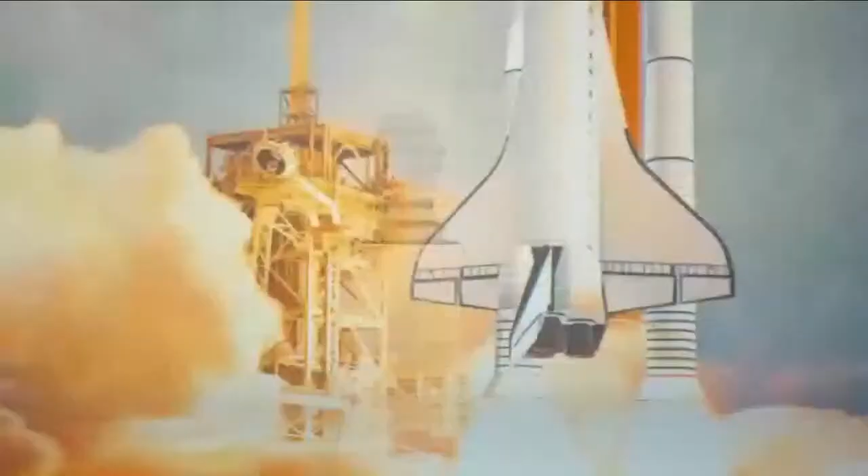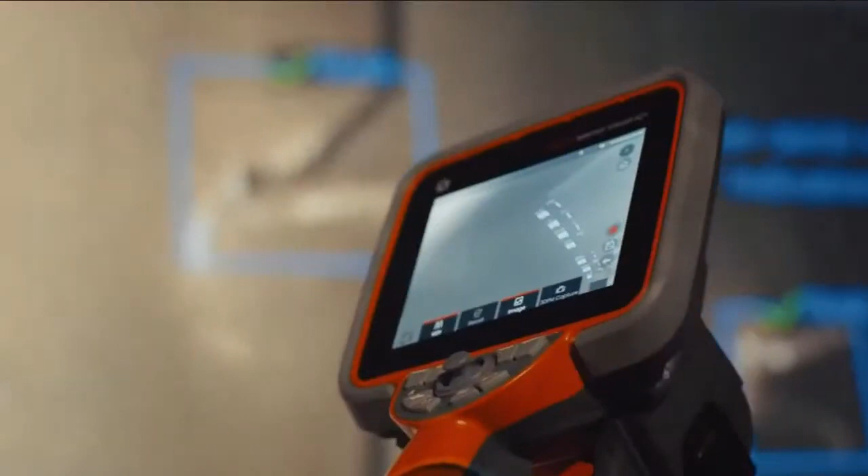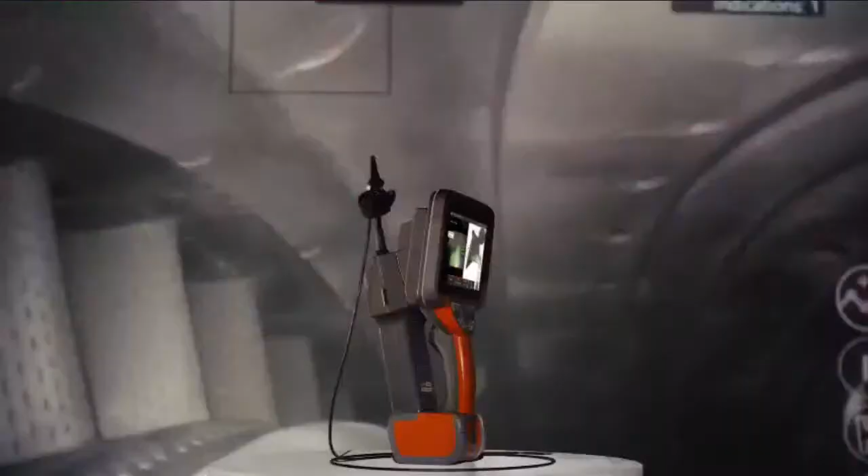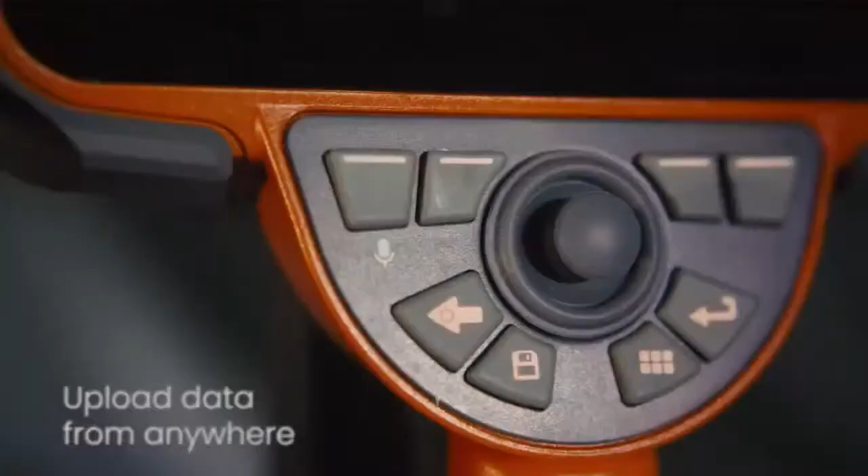This next-generation video borescope features a revamped steering engine for more degrees of articulation and leverages the power of AI to be your second set of eyes, identifying and classifying defects in real time. Plus, with Real3D and its interactive 3D point cloud, you'll avoid errors and get confident results from each inspector every time. And if you're capturing a lot of data, you'll find plenty of room for it here. The Mentor Visual IQ Plus boasts 5 times as much internal memory as the previous model and provides continuous data backup to the cloud. Now you can spend less time managing your data and more time focused on your inspections.

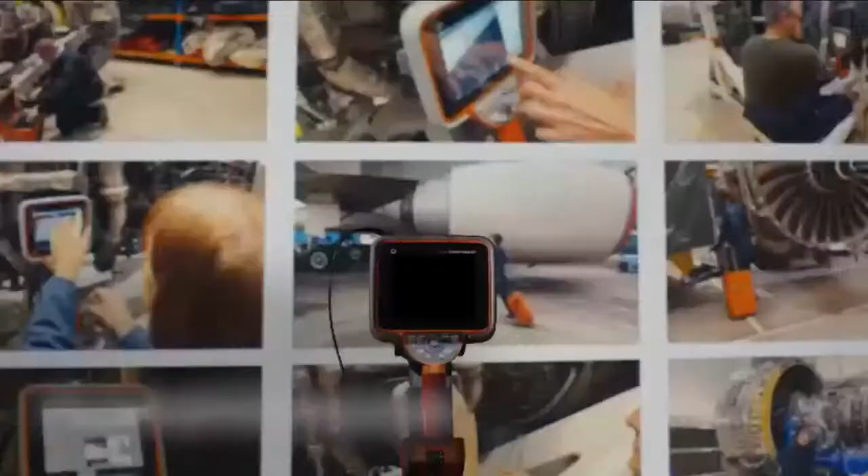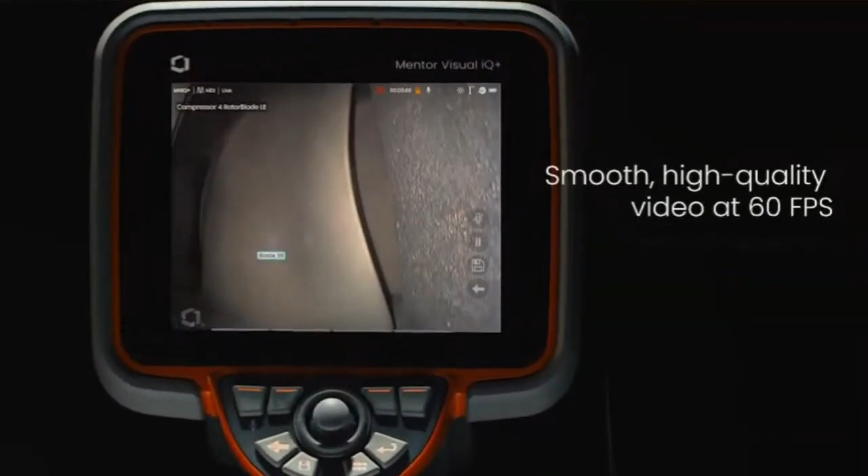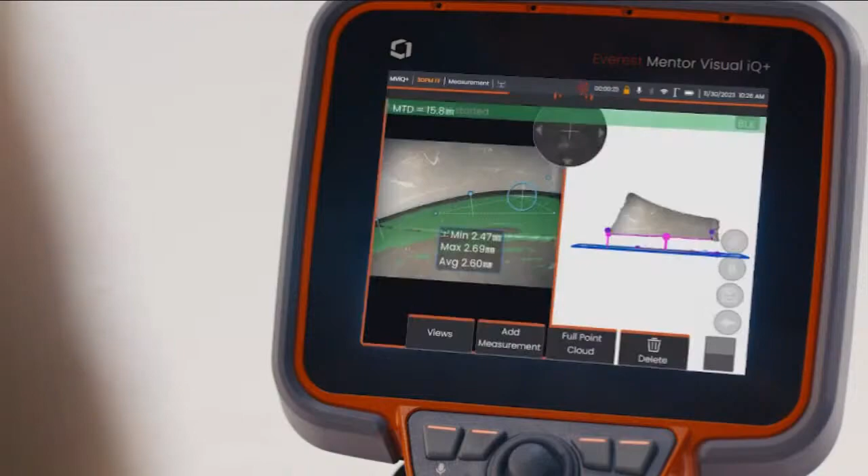Time is never on your side, but now it can be, thanks to increased processing power for faster measurement, stitching, and analytics on edge, like ADR and blade counter. And you can experience it all at 60 frames per second through our best-in-class live HD video feed. Hey Mentor, blade tip clearance measurement. Save image. Oh, and voice recognition? It does that too.

So I hope you liked the video. Yes, very excited to present to you the new Everest Mentor Visual IQ Plus. This webinar is specifically focusing on the new updated measurement content that we have accommodated in this new device. There's lots of new technologies and new content in the new borescope, but this is specifically focusing on the measurement side.

So we'll be taking you through the new measurements and also a new feature that we've accommodated into the device called Learn More. If you haven't already viewed my webinars late last year, I focused a lot on measurement and specifically Real3D. So I'll give you a brief recap on what Real3D measurement is, take you through those new measurement types and an overview of Learn More before moving on to a practical demonstration using my borescope that you see over my shoulder.

And because this is a new borescope, we have remodified the model listing, so we can briefly take you through the different models and what's included in each of the models, certainly from a measurement point of view.

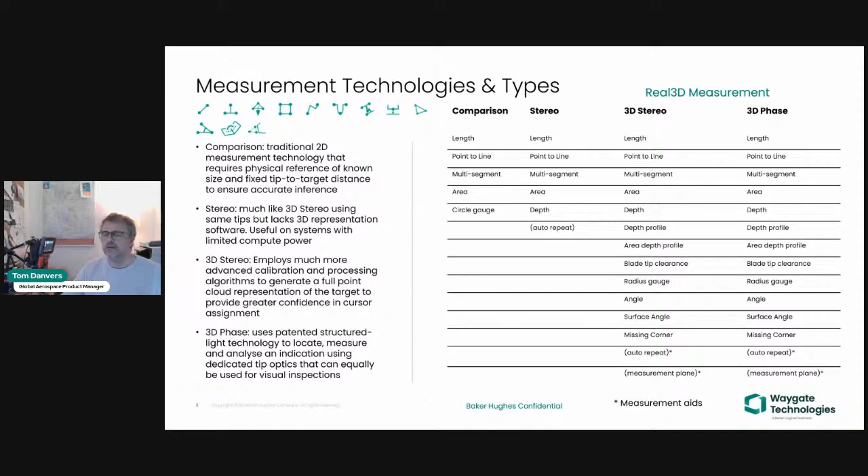For the purpose of this session, we'll be focusing on Real3D measurements and the new measurements included within Real3D. So you see here highlighted angle, surface angle, and missing corner. That brings the total from 9 up to now 12 different measurement types for Real3D.

So yes, Real3D capture is inclusive of 3D stereo as well as 3D phase measurement. So if you have a stereo tip fitted or a 3D phase measurement tip fitted, all of these measurement types under Real3D are available to you, provided you have the right model and the software activated in that model. And we'll discuss that more later.

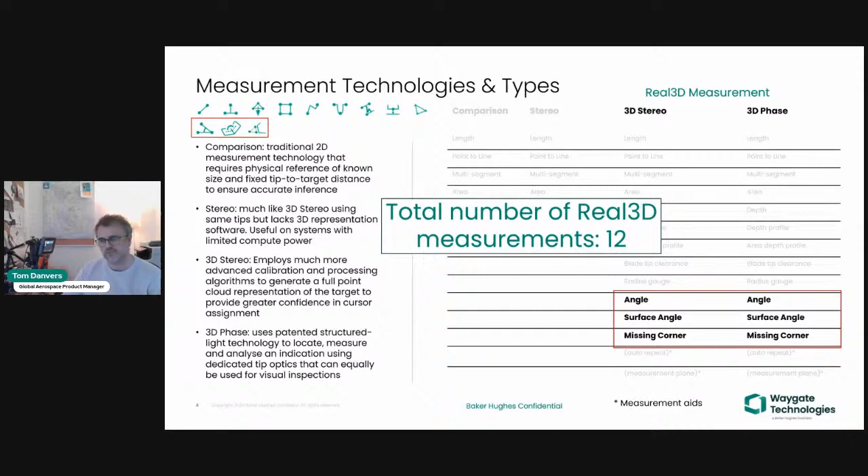So starting off, angle. Angle was actually a measurement that was previously part of the multi-segment measurement type. Multi-segment being, as a reminder, the ability to place down multiple cursors and determine the surface length of all of the cursors that you place down onto the target. And angle was part of multi-segment if you place down 3 cursors.

And we found that a lot of our customers didn't realize that feature was part of multi-segment. So we've lifted it away from multi-segment and given it a dedicated new tile for angle. So angle allows you to measure the angle between 3 cursor points. So basically you lay down the first, the second, and the third, and an angle is drawn between those 2 lines placed onto the surface.

Angle is really designed so that you can determine the angle of a surface on a flat plane or near to flat plane. If you've got a curved plane or a deflected plane, then we'll talk about the more appropriate measurement to use there. But angle is really designed for use on flat surfaces. I'll take you through an example of why angle is applicable from an aviation or gas turbine inspection use case, specifically within the combustion chamber, measuring the angle of erosion, for instance, in a dilution chute hole.

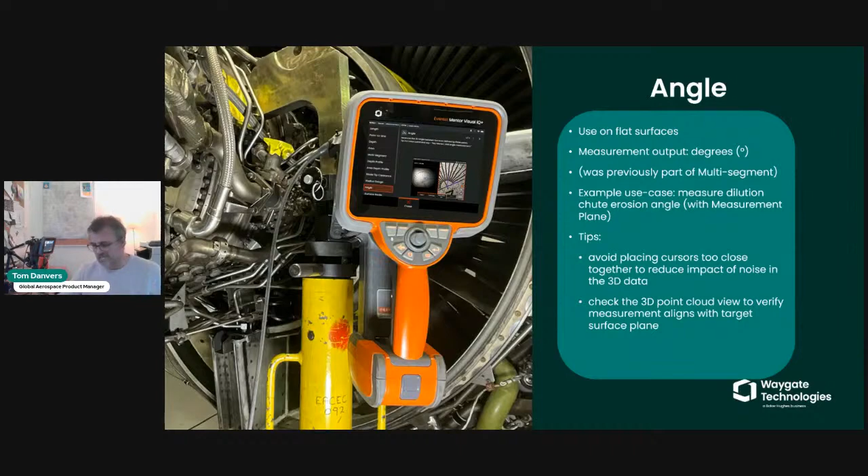So angle, not technically a new measurement. It was part of multi-segment, but it is now a dedicated new tile on the measurement page. This, however, is a brand new measurement type called surface angle. Just like angle before, it outputs the measurement in degrees. The difference here is laying down a reference plane.

The fourth cursor actually is not a point, it's a collection of pixels upon which a plane is generated. So the plane from your fourth cursor intersecting your reference plane is what determines the angle measurement. And you can use this in conjunction with measurement plane as well if there's noise or lots of bumps and deflections on your target. So here's a great example where, from an aviation or gas turbine inspection point of view, we've got tip curl as a result of damage passing through the engine.

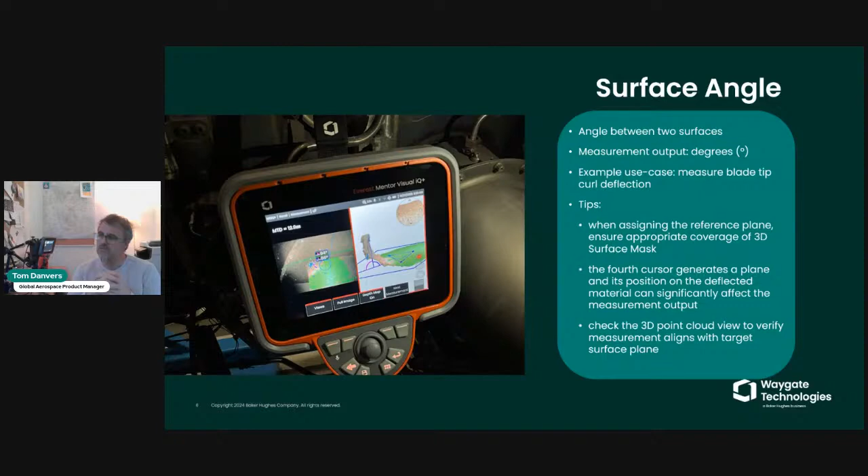The third measurement type that's new on our MViQ Plus is missing corner. So similar to what you've heard me talk about from angle, missing corner was possible from the old method of laying down a measurement plane and using area. But we found there were instances where our customers weren't necessarily aware of that ability to do area measurements in conjunction with measurement plane. So we've lifted that section out and given it a dedicated tile on the measurement page called missing corner.

And when you press the missing corner button, if you haven't already placed down a measurement plane, it will provide you with a notification or a message on the screen to say missing corner needs first a measurement plane applied. So there's some instructional guidance on the Borescope to point you towards creating a measurement plane on the surface before then going back in and pressing the missing corner tile and laying down the points. In this case, to determine the various dimensions associated with missing material on the corner of this blade.

The measurement output is a range of lengths, areas, and an angle. So obviously, I'll talk to you more about that shortly. I'll take you through all that, and then from a measurement cursor limit point of view, that limit of number of cursors is currently 24, as it was before. So you lay down all your cursors, provided they don't exceed that value. You can determine a very detailed shape that conforms to the irregularities that you get when you get this phenomenon happening on the edges of blades.

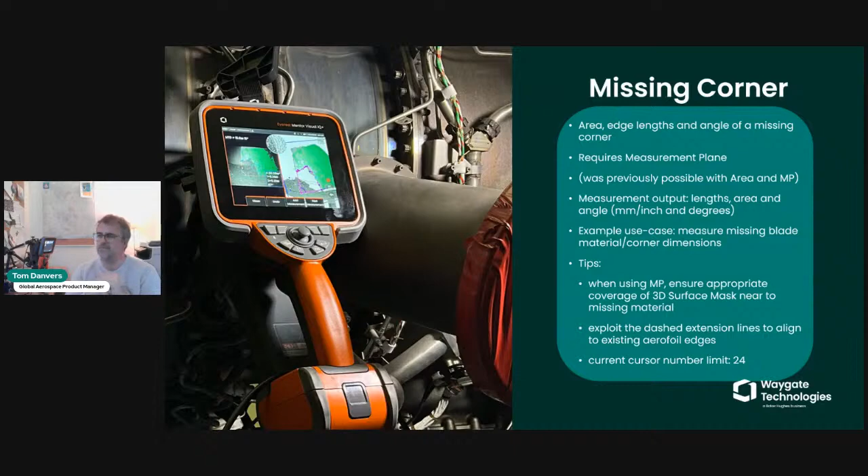And another new feature on our Borescope is, as you've heard me say, learn more. We are very aware of the capabilities. It's a very capable device, and with capability comes complexity. So we're trying to bring more information, bite-sized pieces of information to you without forcing you to go to a manual or a website to learn more, or even necessarily read our measurement handbook, which is a fantastic resource, by the way. Learn more is on the device, so there's no network connectivity required,

and provides you with more information, a short paragraph or two of text that may be on one page or 2 pages, of each measurement type. I'll take you more through it. So for each of the 12 measurement types that we have now on our new Borescope MViQ Plus, but also from the image transform page, we're offering you much more information about all of the different image transforms, such as dark boost, invert, invert plus, rotate, and even the simple ones like illumination on and off.

So every single tile that we have in the image transform page, there is also associated information in the learn more for image transforms and also measurement types. Not just 3D phase measurement types, but also stereo, 3D stereo, and comparison, as you heard me briefly say at the top of this chart previously, we've got learn more content for each of those 4 different measurement types.

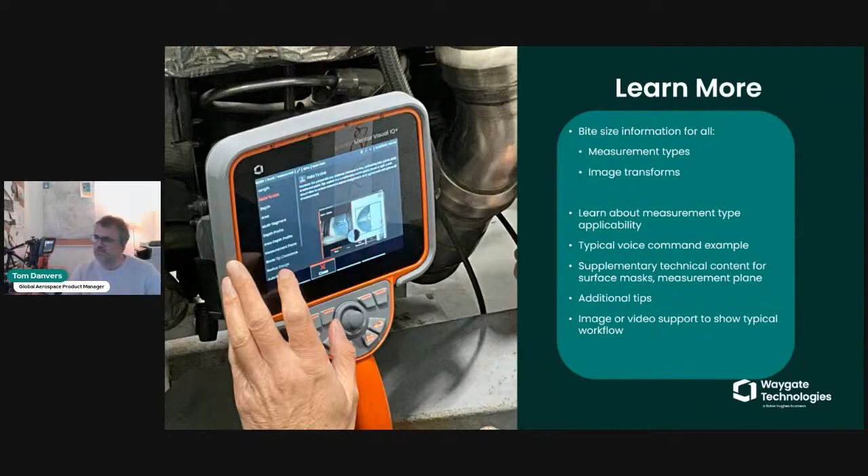I'll switch my screens and show my Borescope. Let's just press a few buttons. Okay. So switching over to my Borescope, I've loaded some example images on my Borescope, and I'll take you through the workflow, how these measurement types are created on the Borescope. And I've also got a blade on my desk, so we can do it live as well.

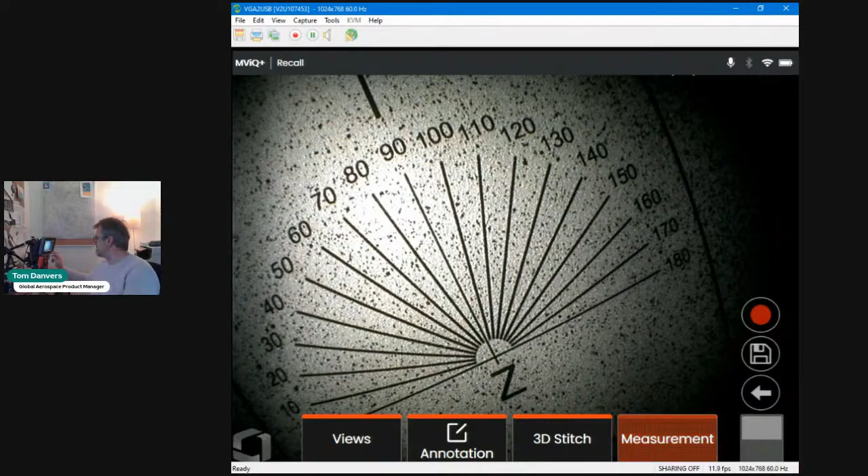So I'll just press my angle. So it's my first simple image, just to show you the simple workflow to create a basic angle measurement. So I've loaded an image. Obviously, you can see here it's like an image of a protractor or various prescribed angles on a plate. Press the measurement button, and I'll just scroll down using my joystick so you can see the tile there. You've got all of the measurement types on that screen, and just as a reminder, we've got the I button that you can see on the top right. So that's where we're going to access learn more when I take you through that part.

But first I'll take you through the angle workflow. Once you press the angle, you're invited to place down, let's drop it down here, put my origin around here, and put my third cursor here. So I've laid down 3 cursors, roughly placed them down, and then I tap and activate the cursor, and then I tend to use the joystick or fine tune using the magnifying glass in the top right hand side.

Very easy. Easy to add some more if I wanted to. And just like you can with other measurement types, there's up to 5 that you can place on any given image.

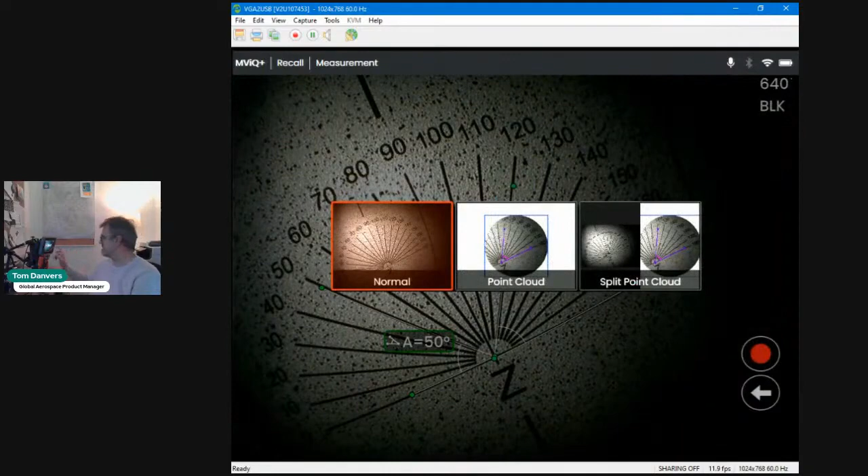And as you'd expect, with this being a real 3D measurement, you've got the options to go to split view, which I spend a lot of time in. I quite enjoy having 2D on the... Oh, I didn't need to do that. Let's just bring that back down. So I tend to zoom in on my 2D view, for instance, whilst also, if I want to, zoom in on my 3D point cloud view on the right hand side.

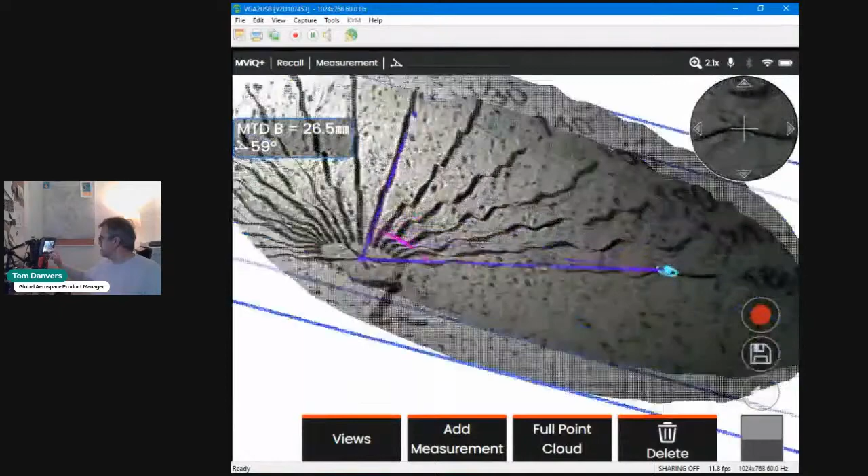And every time you're moving the cursors, as you'd expect, the measurements are being updated. Or you can go to full point cloud view and interrogate the image in full point cloud view. If you go to full, then you've got all of the measurements there on shot. So that's a brief overview. Simply lay down your 3 cursors, and you've got an angle measurement created.

Let's go to image number 2. So back in, image number 2. Here's an image of an igniter plug within a combustion chamber. I think this is from a CFM56. Obviously, you can see no thermal distress. It looks like a brand new combustion chamber, with very white thermal barrier coating.

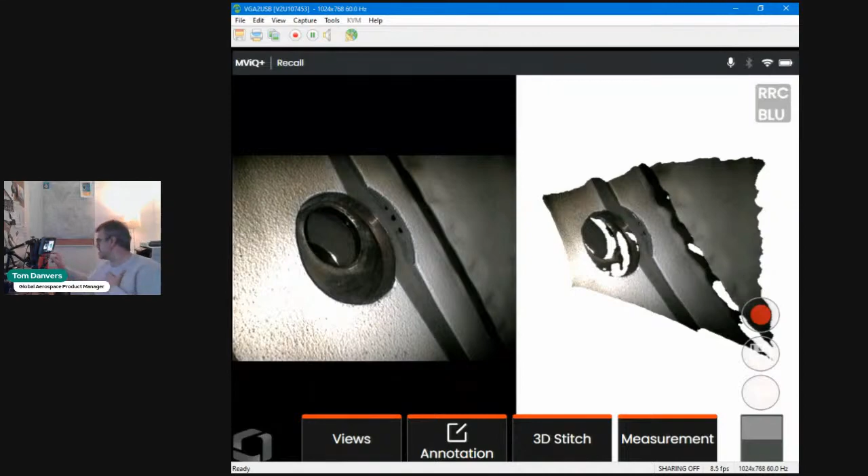But what I'm going to do here, I've seen numerous excerpts in maintenance manuals where it calls upon the requirement to measure the erosion around some of these holes, igniter plug holes and dilution chute holes. So here is an example where I'm going to lay down 3 cursors, but you'll appreciate if there's a requirement here to use measurement plane as well. I'll describe what I mean by demonstrating. So I'm not going to lay down a measurement plane. I'm going to intentionally lay down an angle.

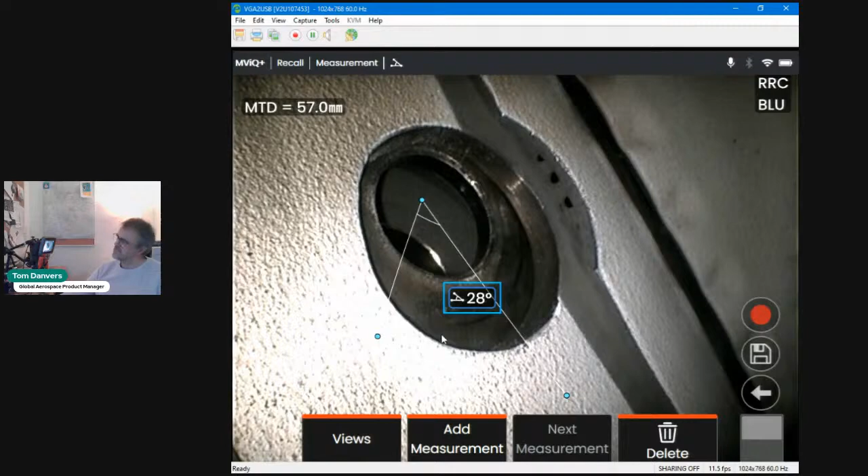And if I just show the 2D view, you can kind of see it's producing an angle. And let's just say this is the extent of my erosion. But then you can see, well, 28 degrees doesn't look right. So as you keep hearing me say, always check your point cloud. What's happening here is that third cursor is not placed in the center of the hole, it's actually placed in the background. And so it is 28 degrees if I don't lay down a measurement plane that covers the hole.

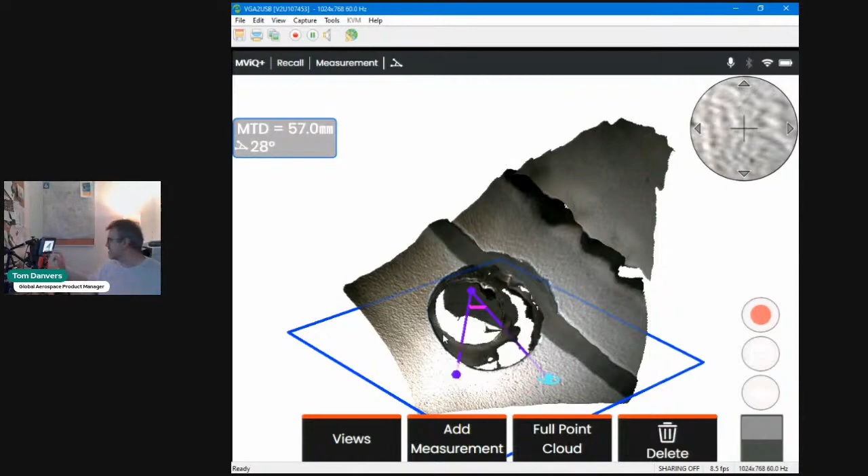So I'm going to lay down a measurement plane. Let's switch views again. Quite like this one. As soon as I lay down a measurement plane, it's going to lift that central cursor up to the measurement plane in agreement with the other two outer cursors. And you can see immediately the effect that it's had on the calculated angle, from 28 degrees to 58 degrees.

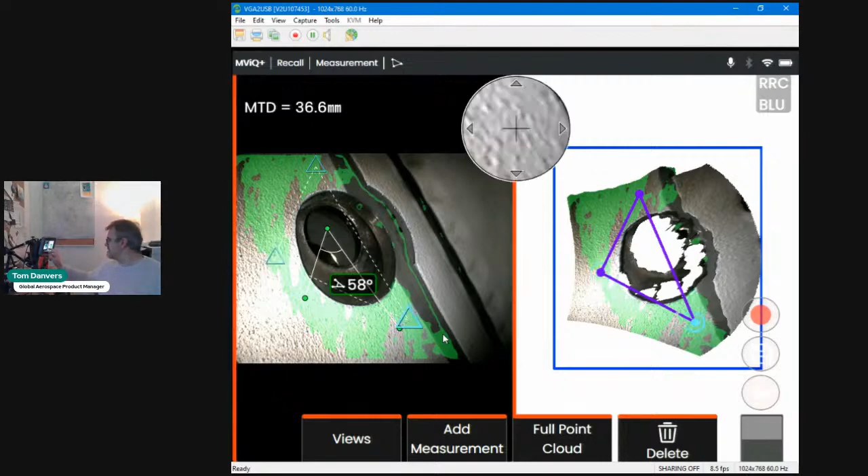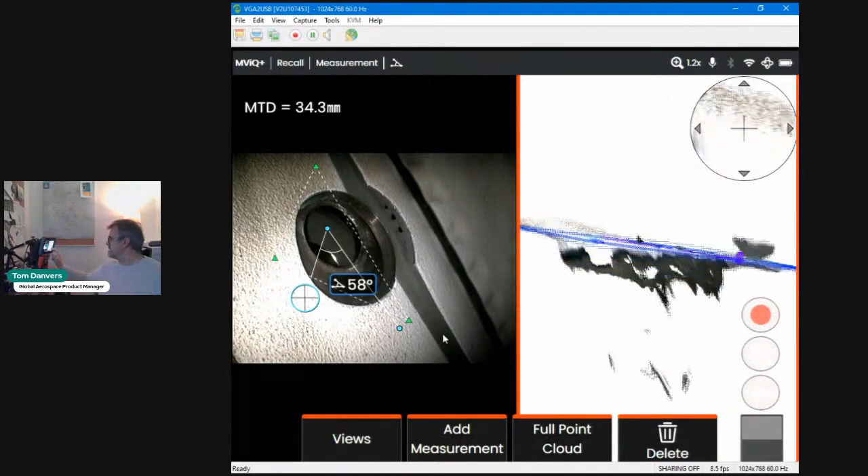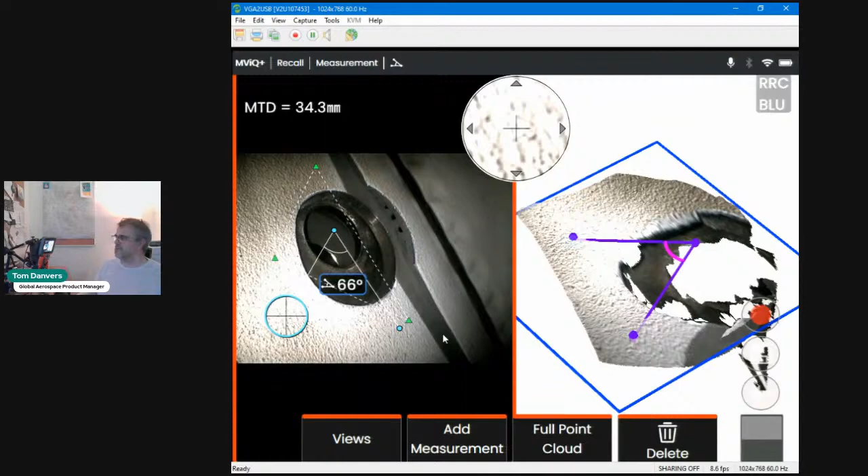And again, if I activate that measurement type and interrogate the point cloud, you can now see my second cursor is aligned to the other two cursors. And provided that's adjusted to approximately the center of the hole, then you're going to get more accurate angle interpretations from that measurement. So there's an example of using angle in conjunction with measurement plane. Please, please, please always check your point cloud, and it will become much clearer to make sure that you've assigned the cursors to the correct position.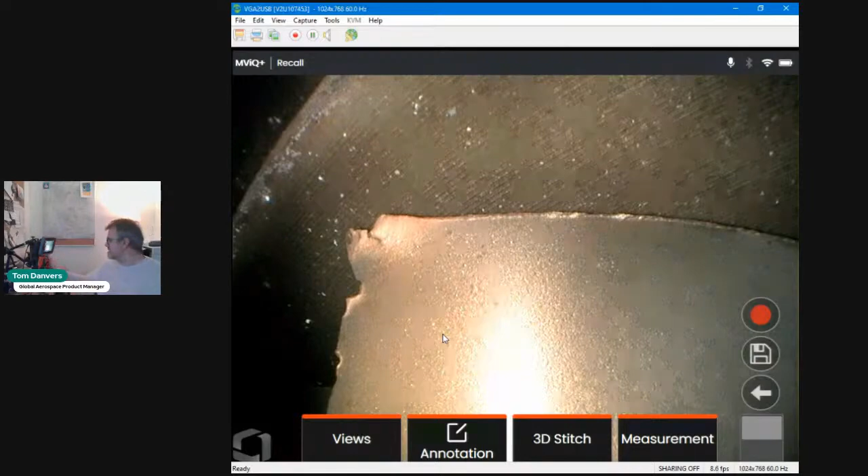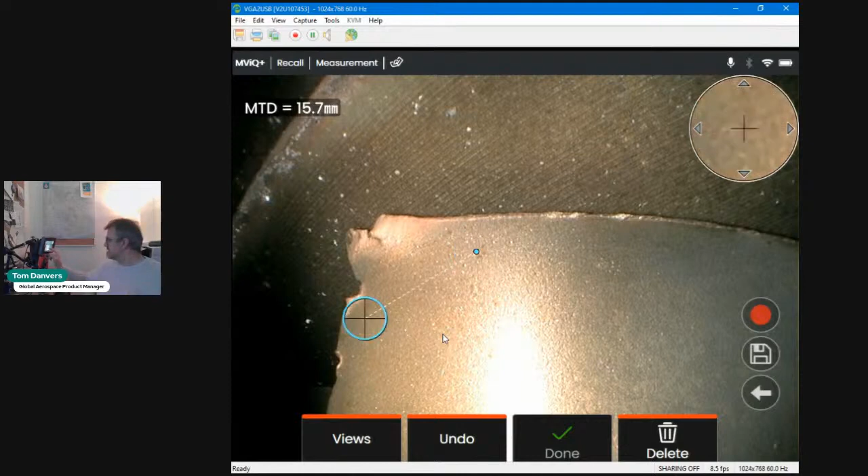But for this one, I'm going to go down to, in this case, surface angle, and take you through the workflow for surface angle. So you heard me say, the first thing you need to do is lay down a reference plane. So that's 3 points. Check the 3D surface mask. That's the green filled in area.

So basically that's going to tell me what's in agreement with those 3 cursors. So have I got a good reference plane? Is the quality of that image low in noise? If it was high in noise, then there would be lots of isolated islands of green surface mask. So in this case, you've got a good agreement because there's a good flooded plane of green.

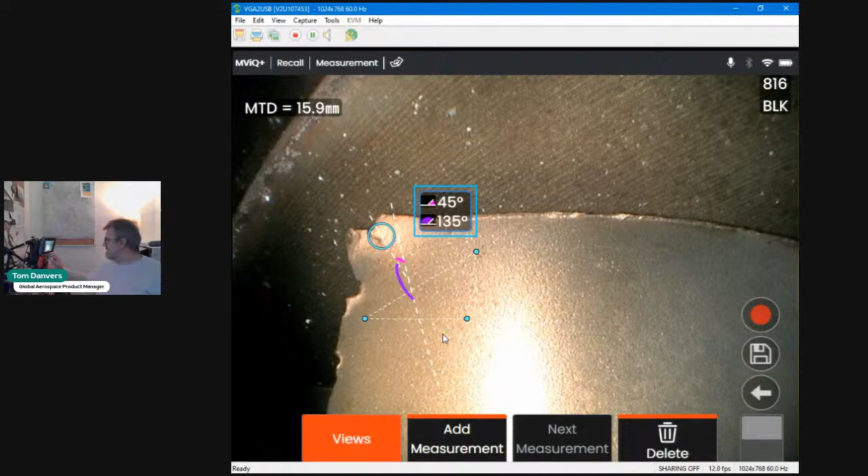And my 4th point, I've just tapped the screen to generate the 4th point, placed on the deflected surface. So you've got the 2 angles that add up to 180 degrees. Again, if you're not already on the split view or the point cloud view, do so straight away and check the point cloud, because this is the point where you need to check the quality of your cursors and obviously the quality of your point cloud.

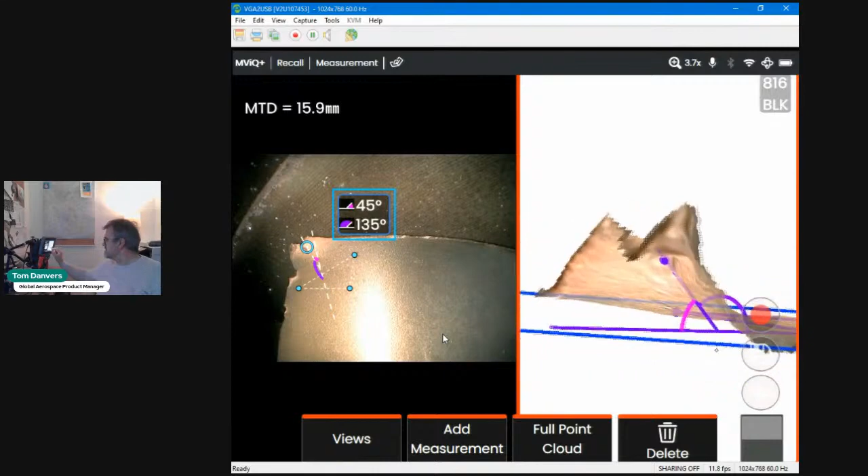So you can see quite easily there's basically 2 angle measurements, one corresponding to the pink or magenta, and the other one is the more purple. And you can see the 2 angle symbols. And so you've got those 2 corresponding measurements for each of those 2 angles that add up to 180 degrees. So just like angle, surface angle also generates the output in degrees.

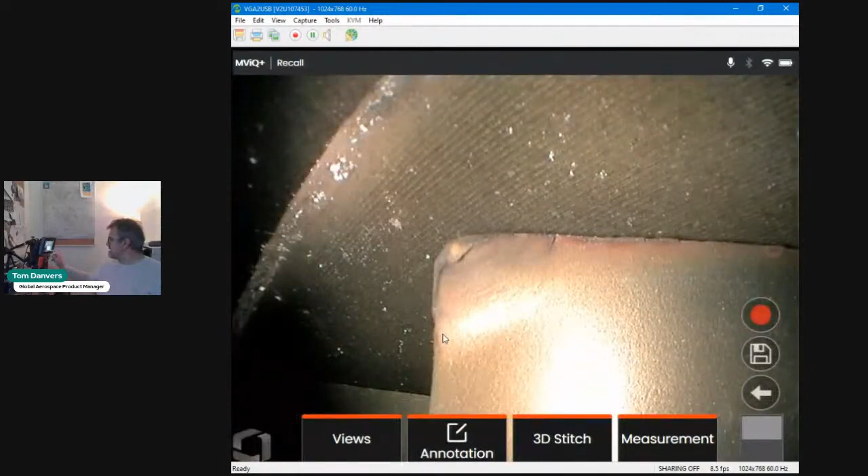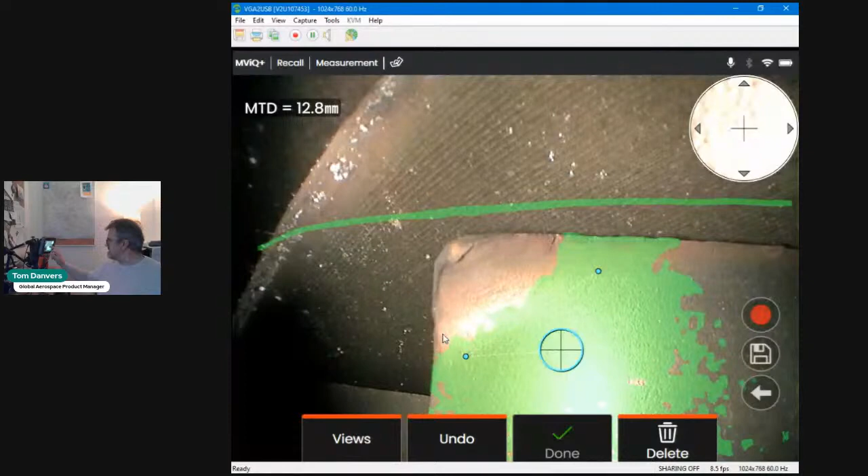Now, let's go to this next image. Do the same thing. Again, this is a saved or recalled image. I'm going to tap measurement, tap surface angle. There's my reference plane, and then tap for the 4th time to place the 4th cursor. As you can see, when you've got an active cursor, it goes from a small circle to a very big circle. And you can see my 4th point is actually a much larger circle, whether it's active or inactive.

The way surface angle operates is the plane of the surface generated within that 4th cursor, and how that intersects with the reference plane, is what's being calculated. So clearly you do need to make sure that you're positioning that 4th point appropriately. And as I'm not in point cloud, I'm just eyeballing it on the 2D image. So again, switch to one of the point cloud views, either the split or the full point cloud view, and interrogate it in this dimension.

So if I minimize those buttons, you're able to just check the position. Is it saying something sensible? It does look like it's near to 90 degrees and it's coming out at 80 degrees on one angle and 100 on the other. And if you wanted to, you could adjust it again.

So as a reminder, that fourth point is not just a point, it's actually a cursor that collects hundreds of pixels. And the number of pixels contained within that cursor depends on its position relative to the edge of the blade. So it's not a fixed number of pixels.

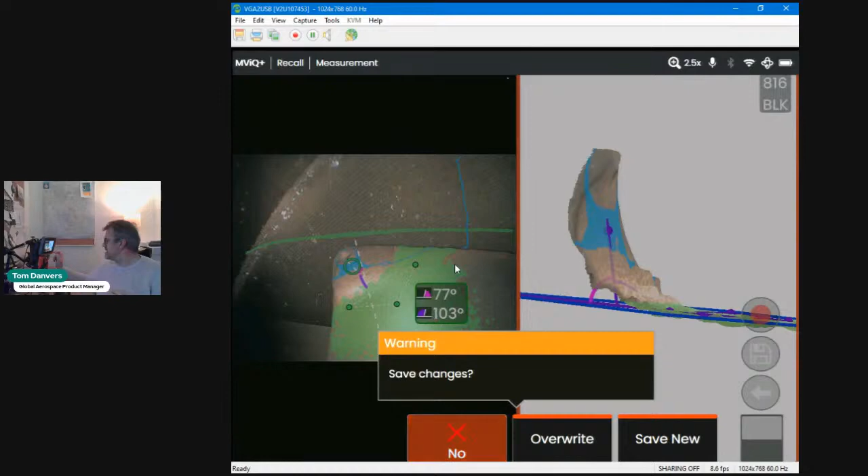So at this point, I was going to do that live on my Borescope. I've got a blade on my desk. This is an edge of a blade, and it's been artificially deflected in a vise. We wrenched over it and deflected the corner of the blade. And I positioned the Borescope, as you can see here, pointing down on it. I'm going to take you through the use case associated with measurement plane and surface angle.

So if I generate a point cloud and walk through the surface angle measurement workflow: press measurement, press surface angle, lay down my reference plane, look for good agreement, and drop my fourth point on the deflected surface. I've got split point cloud view already active, so I don't need to change the view. So I've got an angle there of, well, it's actually deflected 32 degrees.

And if I activate that, there we go. So I'm looking for the quality of, in this case, not the green surface mask, but the blue surface mask. So you can see there's lots of isolated islands there.

And as I move my cursor around on the screen, you can see that angle of, well, what was, say, 25 degrees, 23 degrees. And as I move it around, it's jumping around. So it looks like there's undulations on the surface, or there's noise in the point cloud that's contributing to the variation in the angle that you're getting as you move your cursor around.

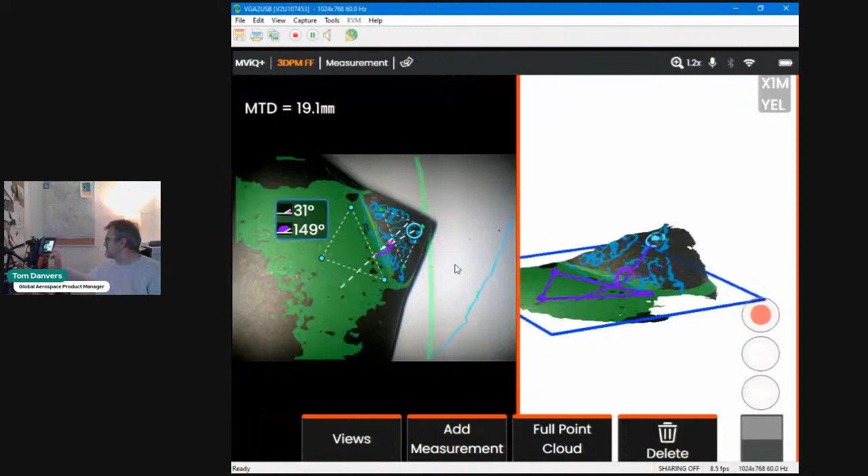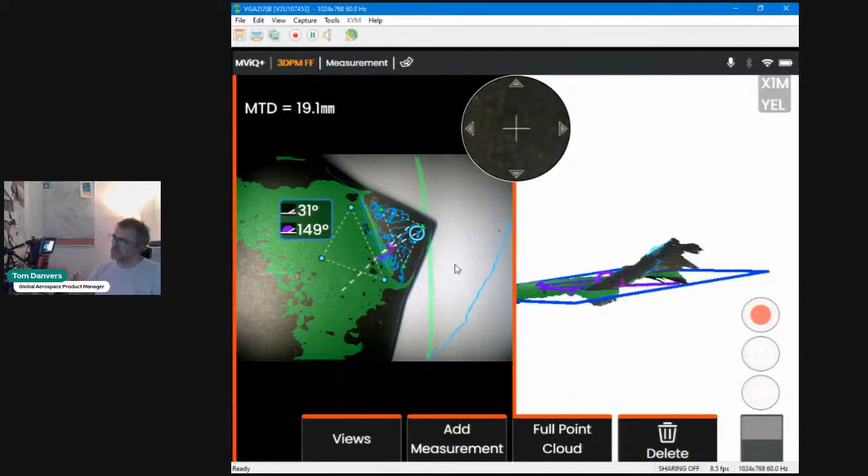So there's my measurement plane, but if I activate my angle measurement, I didn't need to do that. There we go. So I basically now snapped my 4th cursor point to the measurement plane. So as I move that cursor around, oh, I need to move the cursor, not there. Okay. So actually what you can see, as I move the cursor around, it's basically glued to that measurement plane. And so that angle measurement now is not changing.

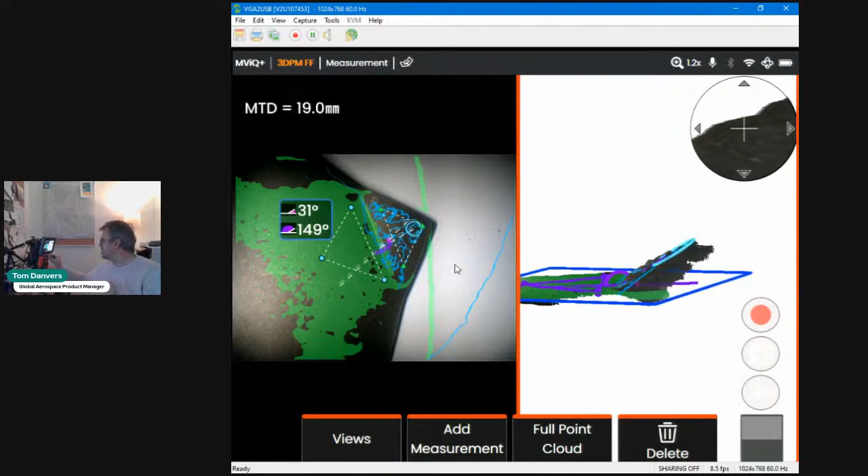So all of the noise and the undulations that you see in that small deflected area has been cleared by laying down those 3 points for the measurement plane. So as I move that cursor around, I can move it around in the point cloud. You can see it's continually reading out the 31-degree value. So it's a good way of cancelling out a lot of the noise or the undulations in that surface that might exist, so that you get more confidence in the overall deflection angle that you have in that surface.

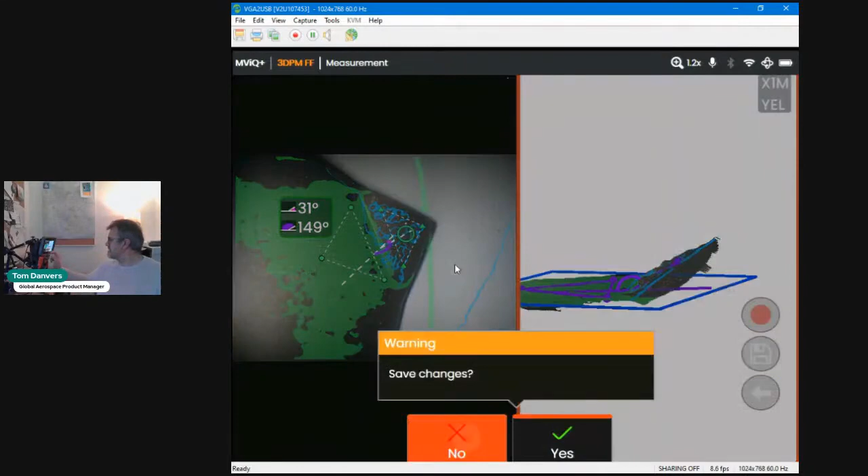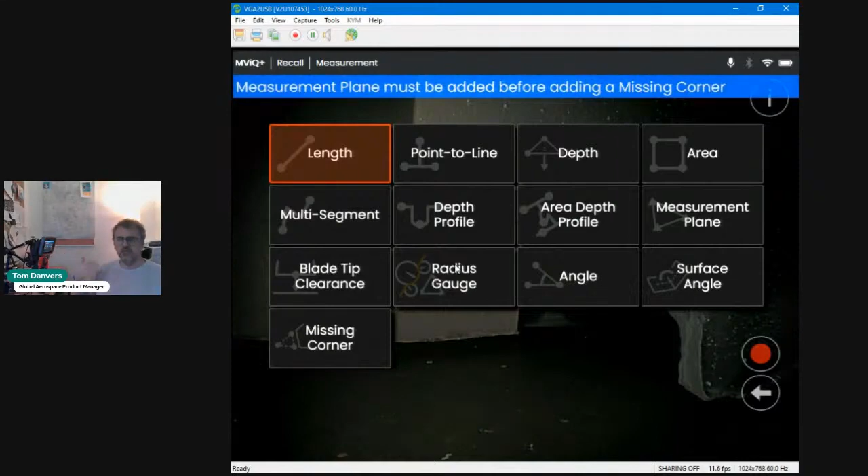Missing area, missing corner. So I've got some more angle recalled images to show you. So again, a lot of obviously missing material that you see on the corner of this compressor blade. Tap my measurement button, and you can see the new tile that we have here for missing corner. So just draw your attention to the top of the screen. When I press enter or I tap on the screen, measurement plane must be added before adding a missing corner. So basically, you're unable to generate a missing corner measurement until you've laid down a measurement plane.

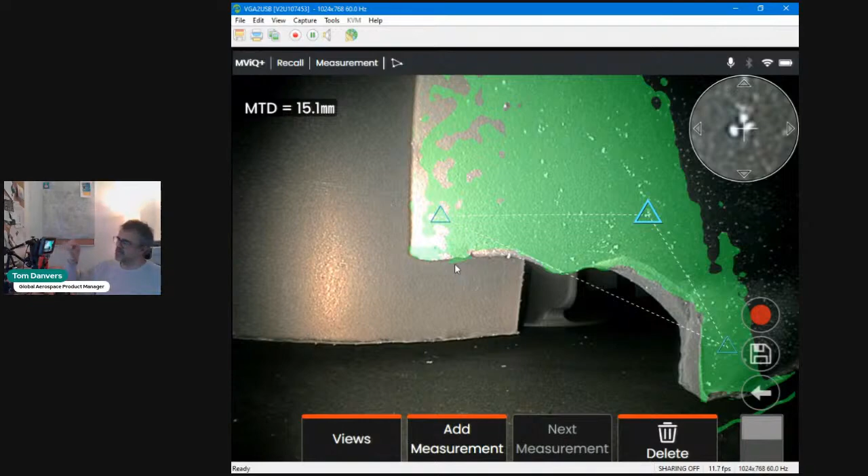So go to measurement plane, as you've seen me do, lay down my 3 cursors. Forgive me for repeating myself, but it's always important to make sure that your 3D surface mask is in good agreement. So I'm checking the quality and the expansiveness of the 3D surface mask. So I've got good agreement, because now I'm going to be laying down a new measurement, add measurement, and I go down to, in this case, missing corner again, and I press missing corner.

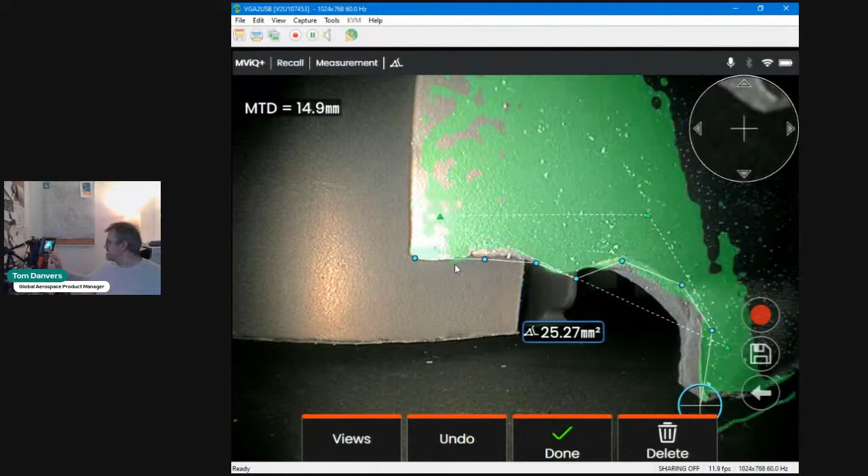I'm now invited to add as many cursors as I like, provided it doesn't exceed 24. Don't forget there's a measurement plane on here, so I can be placing cursors in thin air. So if I just press undo, go to roughly the corner of the blade, I don't have to lay down anymore, because as soon as I press done, it's going to snap the last cursor to the first cursor and give you this output.

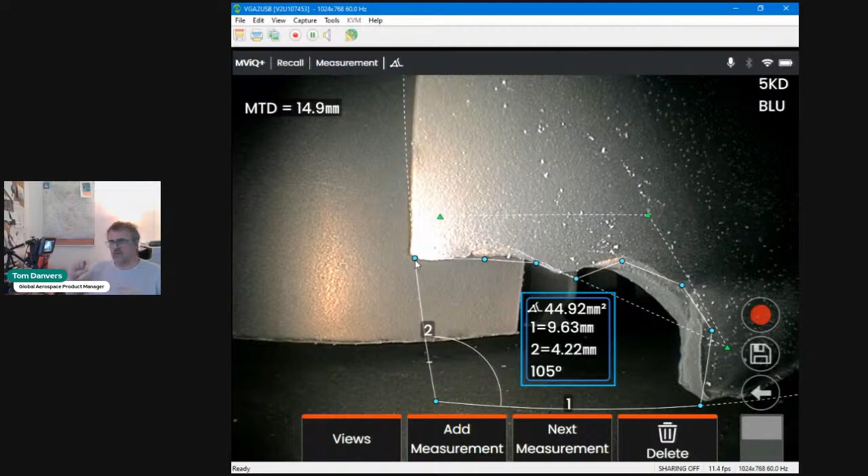So I've kind of intentionally laid down those cursors very quickly without too much care, because this is the point where you can start adjusting and fine-tuning those cursors, so you've got the measurement that you need the most accurate. Let me just minimize those buttons. First thing I tend to do is I'm looking at those projected lines that you see up onto the edge of the blade. So I just bring my mouse to it.

So there's a line here between these 2 cursors, but it's also projecting up onto what is likely to be the leading edge of this blade. And likewise, from this cursor to this cursor, another projected line onto the tip of the blade. So I'm positioning this cursor so that these projections marry the original surface or the existing surface that you have on the blade. I'm conscious this is obviously not in the point cloud, so this is the 2D view. So I'm just going to do some rough adjustments.

And just like you can if you're doing area measurements or some other multi-cursor measurement, if you activate a cursor, let's just say activate that cursor and hold it down, a new one has appeared. It creates a new one between the one that you've just held down and the previous cursor. So you saw me apply cursors in a clockwise view. So when you hold the cursor down, it'll produce another one in the anti-clockwise view in this case. So that's just a quick tip for creating new cursors if you need to. So I'm just roughly placing these down onto the edge of this surface.

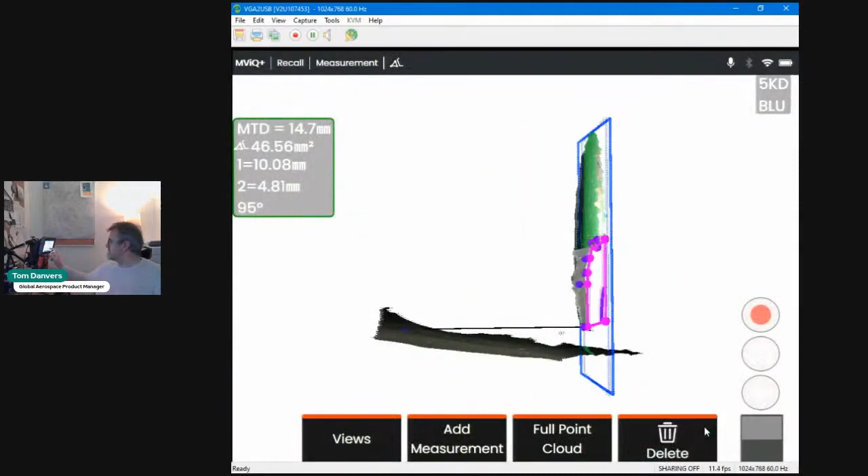Checking my projected lines, it all looks good, but again, only looks good from a 2D view. So I'm going to go to my full screen point cloud view. You will expect it to obviously snap to the plane because we have a measurement plane. But here's a good instance where you can check with these guidelines against the cursors that you're placing it onto the actual blade itself rather than in thin air. So those are in pretty good agreement.

So you can only really do that by checking the point cloud and maybe coming back to a view such as this and saving it and including it into your report. So there's your area measurement of approximately 47 millimeters squared. You've got 2 length measurements. Arguably, the most important that you'd require is perhaps the length measurement for number 1.

A lot of the manuals' acceptance limits for missing material are actually a function of chordal width missing material. So does it exceed 25% or 33% of the width of the blade? And you can only really determine that by doing this measurement and establishing the length of number one in this case. So that's about 10 millimeters. And you'll know in your manual what the full chordal width is for that compressor blade. And then from that, you can work out the percentage missing.

But yes, we provide both lengths of that shape that's created plus the angle that you see. But just to recap, all those cursors up to 24 can be applied. Make really good use of the projected line feature that we have here, because if that is not appropriate, as I'm forcing it here, you can see that's having a massive effect on all of those measurements. So make use of those projected lines and checking the point cloud. So I've taken you through angle, surface angle, and missing corner.

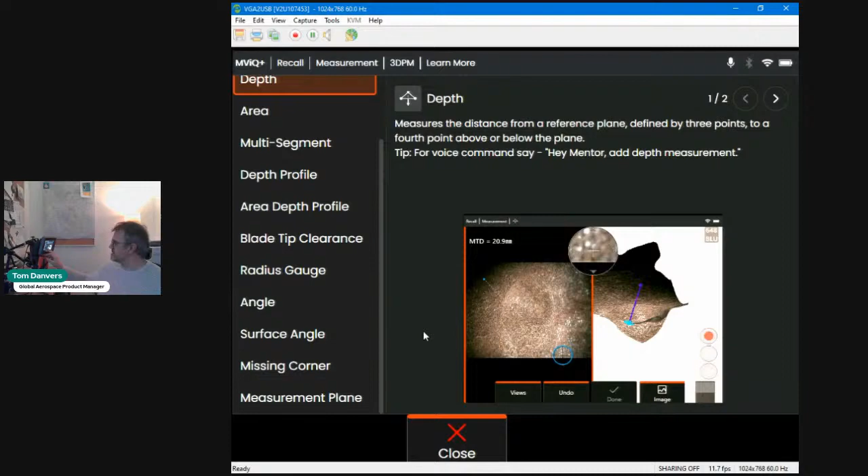We're conscious that there's lots of different measurement types. We offer a vast array. And sometimes, you've heard me say in previous webinars, when you're doing a length measurement, it might be more appropriate to use the depth function, because depth can be described as a sort of point to surface. If I press depth, there's more information about depth. If there's more measurement types than we can fit on the screen, you scroll down and you can learn more about all of those 12 measurement types. Plus, you've heard me talk about measurement plane. A measurement plane isn't a measurement type, it's a measurement aid.

But it's a really useful way to extract more use out of a lot of the measurement types that we have here. So there's lots more information there. So if I go back to my live screen and press the image button, this is what we call our image menu page. I call it the image transform page.

So these are functions that allow you to alter the quality of the image that you're seeing in the live state. And so we call these image transforms. And as you've seen me say from a measurement page point of view, with the I for information at the top, there's one here as well. So if I go across to dark boost and press I, I now activate the Learn More state in the image menu, and we're showing more information about dark boost.

Just exactly the same layout or format that you've heard me describe in the measurement state. So all of those image transforms, when you go into freeze frame and press image, there are others like zoom, for instance, those other image transforms appear. So I'll just demonstrate that.

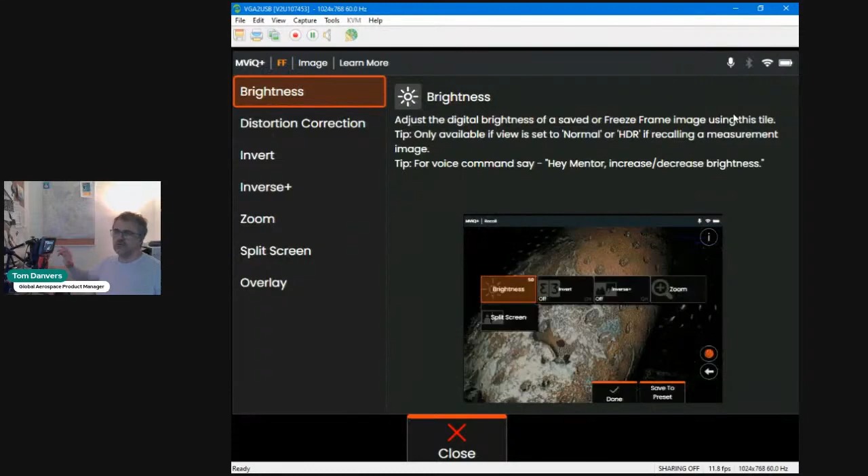So if I tap the screen, go into freeze frame, go to page 2, press image, and you've got a different set of transforms here, for instance, in freeze frame and image. So you see zoom and split screen here, for instance. So these are the image transforms that correspond to this state in freeze frame. So all of the transforms associated with this state in freeze frame appear here in the freeze frame in Learn More.

So that's the demonstration on those 3 measurement types and Learn More. Please do, if you've got any questions, please post them. I'm going to switch back to my presentation. Press a few buttons. Here we go.

Brief moment talking about MViQ model designations. So MViQ Plus model designations. So in the old model, we had, what did we have? It was inspect, touch, and analyze. Here we have start, enhance, and pro. So we still have 3 models, and the content of those 3 models is different and has changed. They're all touchscreen capable, unlike before with the basic inspect model of the outgoing MViQ model.

Lots has changed. This is a very stripped down version. I didn't want to complicate the issue anymore by putting all of the content down, because we really just want to focus on the measurement types. But the ultimate, or the highest model tier, being the Pro tier, includes all measurement bundles.

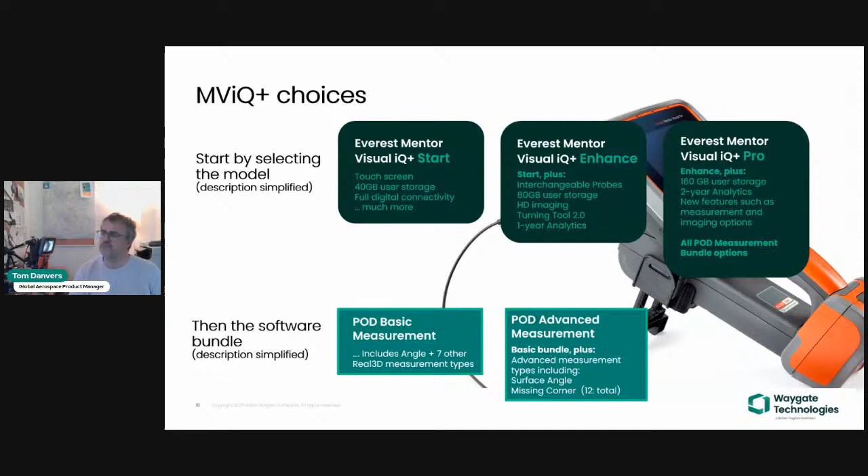So a few more minutes to go, just summarizing what I've taken you through. All of the new measurements, essentially 3 new measurements, of which really surface angle is the true new measurement. We've lifted out angle and missing corner and dedicated new tiles to those. So we have 12 tiles now on the measurement page showing the different measurement types. And those measurement types apply to some of those bundles and not all of them, depending on which model you have, that you've heard me talk you through.

Spent a bit of time talking to you about Learn More. That's a new feature that we want to introduce to our users, to give them more bite-sized information, so they're not having to read manuals and go to websites and all the rest of it. Just brief content that's full of technical content and best practice, and even what the tips would be if you voice activated your handset to generate that measurement type.

I always like to talk about the measurement handbook. It's a great resource. Of course, we've updated it to reflect all the new content that we have in the new MViQ Plus device. So please do, if you haven't already, go to our website, download it. It's all updated and all available to you on our website using that link.

And to summarize, this is the second of several. I've got 6 lined up at the moment. So next week, we'll be talking to you about another feature that we've included on our new borescope. Our communication between ourselves and the Rhinestahl FutureDrive turning tool has been improved. So we'll be spending some more time on that this time next week. And as you can see, there's more planned in the future.